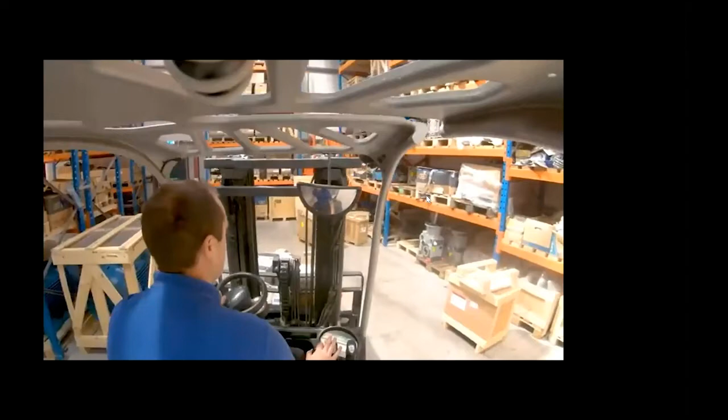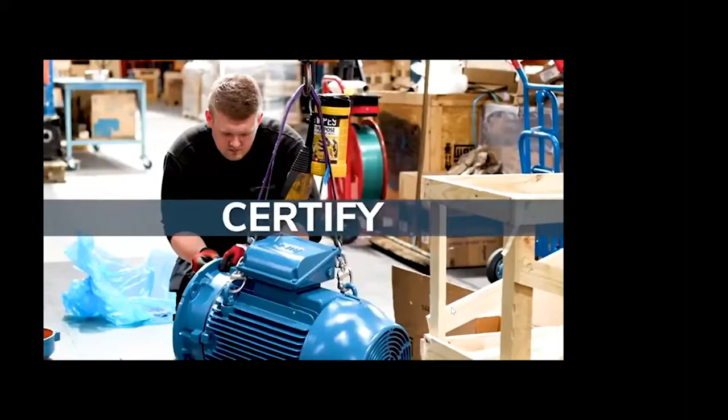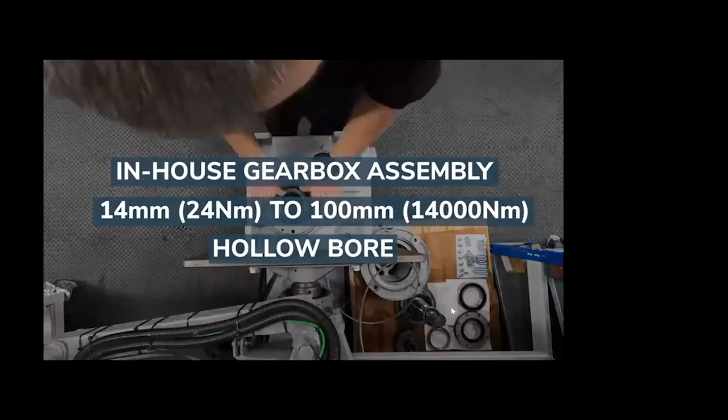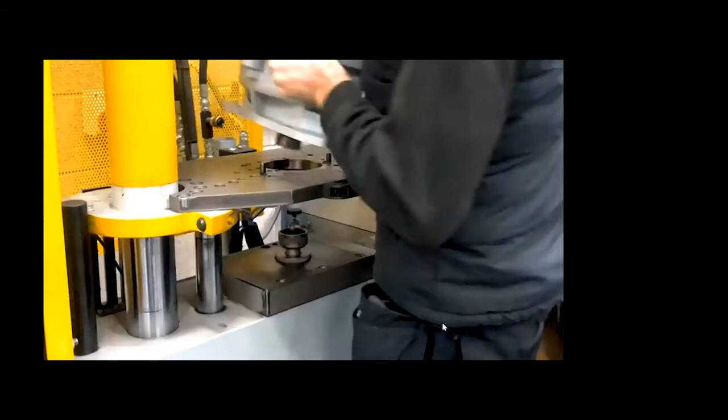Welcome to Technidrive. We'd like to show you a little bit about what we do here and how our expertise in drive systems and integration enables us to lead the way in our industry. Technidrive is not just a name. We are not just a supplier, and we are definitely not just a distributor. We are a system integrator. We take the best that our principal suppliers can build. We engineer them together for our client base. We make their products better, more efficient, more reliable, and better than their competitors.

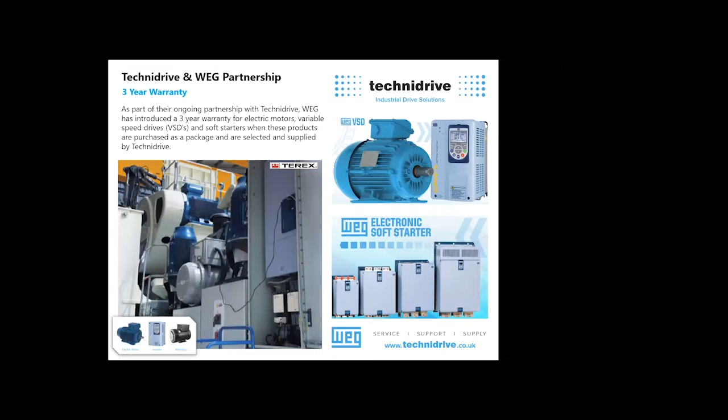Another special feature of the partnership is the 3-year warranty. Something we've been doing a lot is when we supply an electric motor with the variable speed drive and sell them together as a package, we change the warranty from 1 year up to 3 years. That means that electric motors and VSDs, 99% of the time, fail because of application issues, because they're installed wrong, because they're not protected correctly, or things like that.

So what we do is whenever we select it together, we know it's selected right. You put the VSD with the motor, you know it's protected right, and we can basically upgrade that warranty to a 3-year warranty. So that's another special feature.

Another one of our major partners is Bonfiglioli, and we're Bonfiglioli Best Partner, which stands for Bonfiglioli Excellence Service Team. It's the highest accolade in the Bonfiglioli family, and the main feature this allows us is it basically means that we're a satellite assembly plant.

So we no longer stock gearboxes as complete gearboxes, we stock them as component parts and build them from scratch. This allows us flexibility of thousands of combinations of gearbox, all of which can be assembled within 1 hour. It allows us factory level purchasing, factory level technical assistance. We get very involved with product development for both mobile and industrial, and we have huge stocks of it as well.

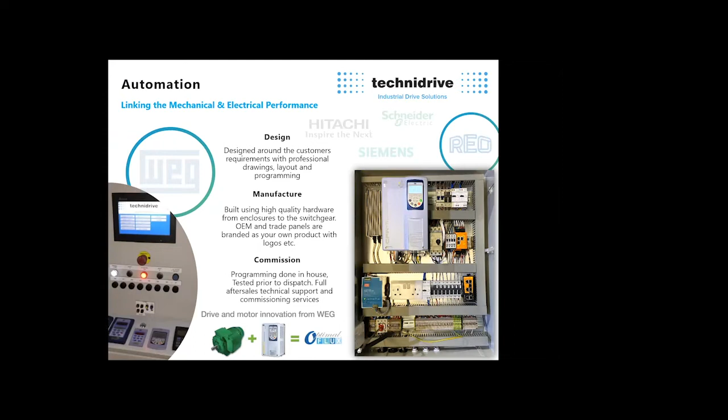Part of what we do is we start off with the design of the complete application, normally starting with the motor and gearbox, where we do a selection on the motor and gearbox, what the torque requirement needs to be, what size the electric motor needs to be, then go back to the VSD. We then start to look at the control and automation that needs to fit around that VSD.

We then design and build the full electrical control system. In-house, we do all the PLC, HMI programming and commissioning. We do the inverter programming and setup. We have in-house testing areas, and then we do a lot of technical support via phone, email, and remote access, which is becoming more and more a feature of all our automation systems, where we're putting in systems to allow us to access remotely, program, diagnose faults, and do all that kind of thing remotely.

One of the strengths of the automation department is what we call soft PLC programming, different to your normal PLC programming. This is one of the main features I want to show you today: within most modern inverters now, you have soft PLCs built in. What that does is allow easy programming of ladder logic within the VSD, and the VSD has access to all the parameters within the motor.

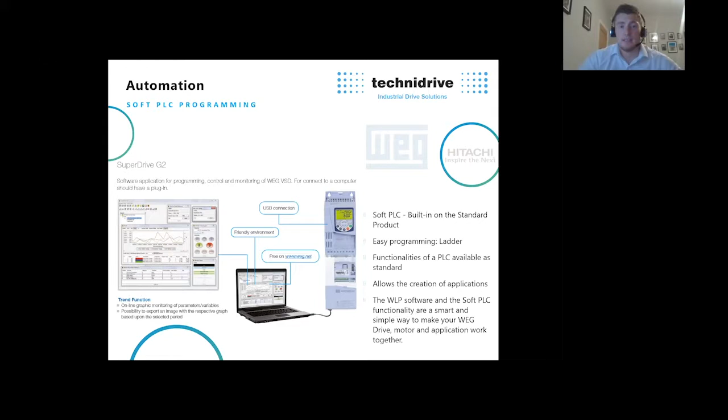So we can do things like virtually any combination of control. You can monitor torque, speed. You can have dedicated user parameters to sense torque and speed. You can have empty chamber warnings. You can have volume fill calculations, auto clean cycles.

For example, you can use figures like what current a motor is pulling to trigger something else in the plant, all without adding any PLC or additional hardware. You could use torque, for example, to monitor something, switch something on, or control a feeder or a belt according to the torque percentage, and that's all done within the drive.

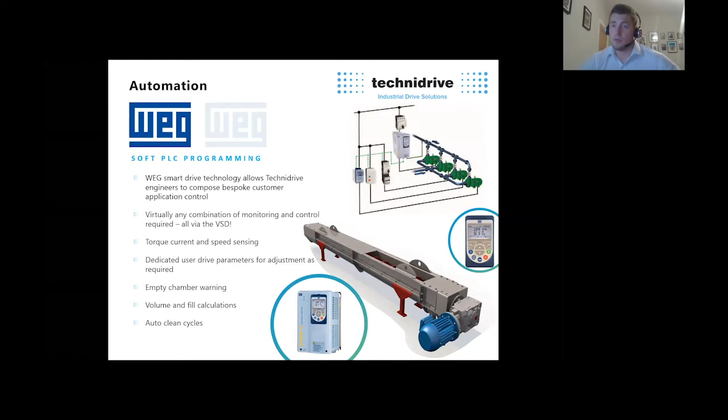So now I'm going to take you through about 5 or 6 different application examples, which will hopefully be of some interest to you.

The first one is a Telestack ship loader project. In this project, we took on to select a full electrical drives package, starting off by selecting the correct torque and speed, and the kilowatts of motors, all based around ensuring the customer gets a maximum feed rate through his plant. This is a mobile ship loader, and basically the name of the game is loading full ships full of aggregates. In this particular feeder setup, it can be emptying 4 lorries onto belt feeders at any one time.

So we started off, we did the full torque calculations, we did the kVA calcs for the generators, and we then drafted a proposal for WEG VSDs, WEG electric motors, Bonfiglioli planetary gearbox, Bonfiglioli bevel helical gear units, auto feed and torque control depending on the load.

So we basically ran the belts as fast as they could according to torque. The heavier the belts were loaded, the slower they would run. Basically, we maximized the amount of kilowatts we had so that it was loading as fast as it possibly could. If the belts were quite empty because the lorries were pulling away at the end of their load or at the start, the belts basically ran as fast as they could. We did all this, provided 3-year warranties and everything, and supplied the customer with the pre-programmed VSDs and all the assistance throughout the project.

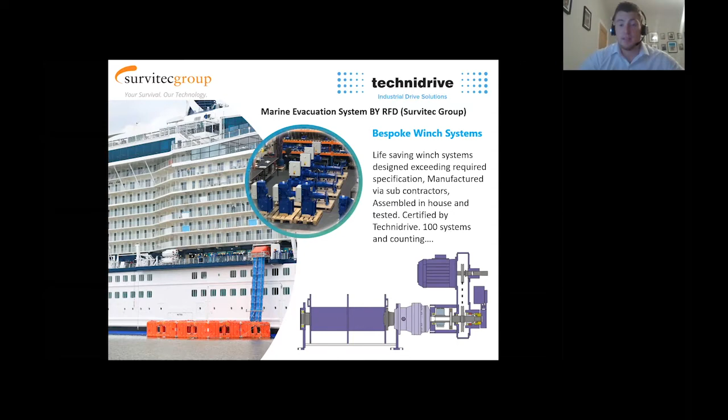Bespoke winches, just to show you our capability to do any sort of bespoke system. In this case, we designed and manufactured, via subcontractors, over 100 winches that go on cruise ships for lowering life rafts into the sea. It's a very interesting application for us, one we do for another local manufacturer here in Northern Ireland, Survitec. We also do an offshore marine evacuation system for the same company, again something we designed from scratch, done all the FEA analysis, all the life cycle testing, and we basically completed that project in 8 months from start to finish.

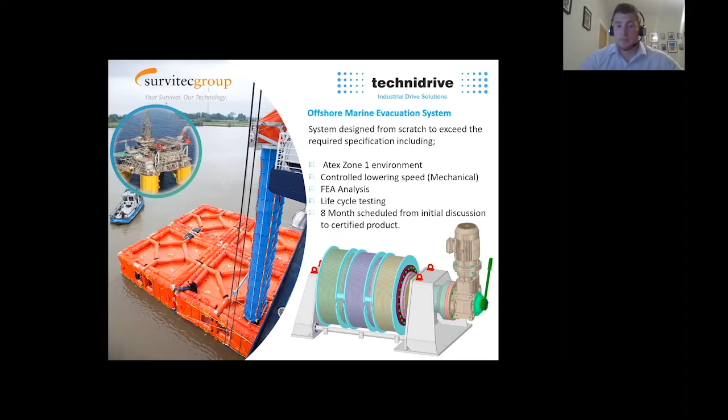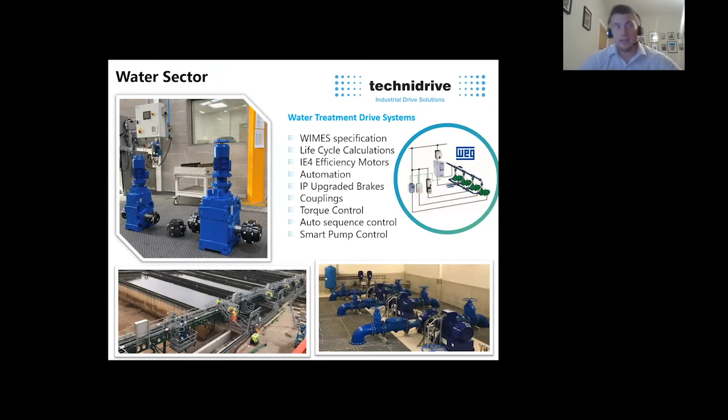Another place we're very strong is the water sector. I know some of you will have wash plants and thickeners and whatnot in your plants. So we do a lot of WIMES specification motors, automation and thickeners, IP upgrades, couplings, torque control, auto sequence control, smart pump control. We've done a lot of selections and design for items within the water sector.

And then this is one that will definitely be of interest to you, and I'd be pretty certain you'll all have gearboxes of this type within your quarries. It's a compact feeder drive, a bespoke design by Technidrive and Bonfiglioli together. Basically what we do is take a track drive design, which is very similar to the gearbox you would see inside the tracks of your JCB excavator. They're a very, very high torque compact gearbox, and normally not that easily adapted into industrial applications.

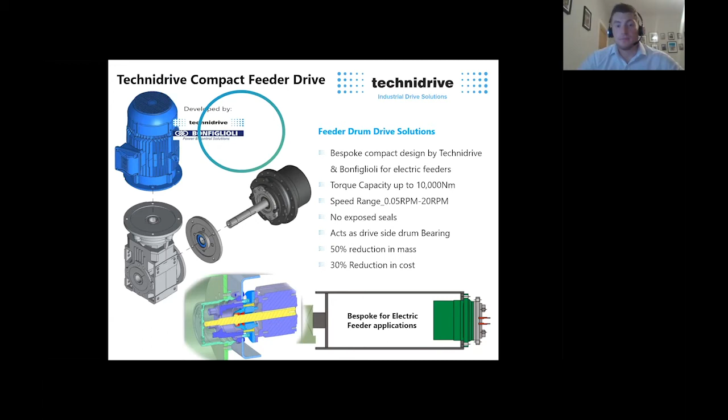So what we do is it basically goes into the head drum like it is in that bottom graphic, and it allows us to have no exposed oil seals. It acts as a drive side bearing, giving a 50% reduction in mass and a 30% reduction in cost. I've included some pictures here of it in application.

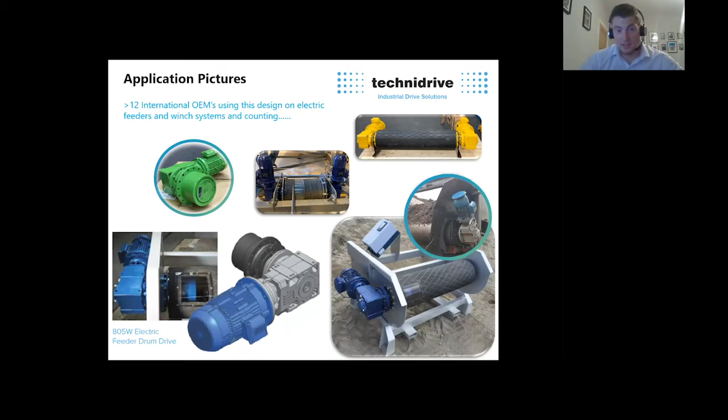And I guess, to break things up again, we have produced a bit of a marketing video on this exact application, which I will show you now.

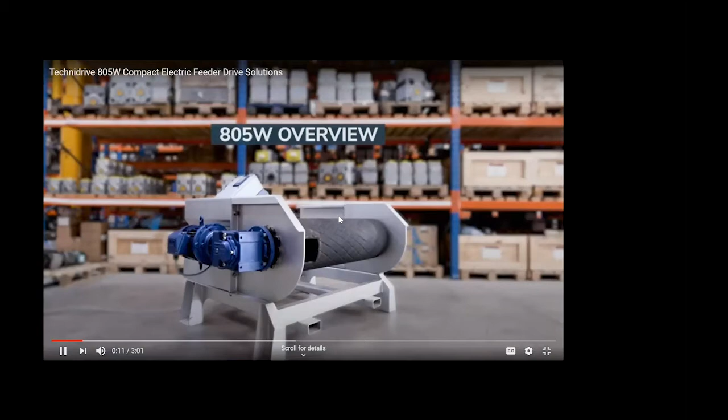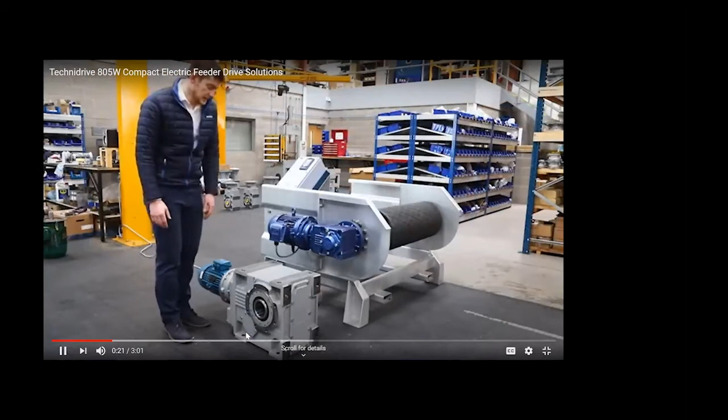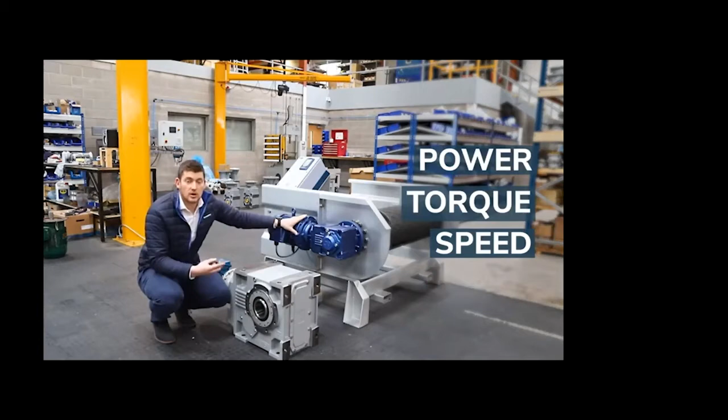One of the main reasons why I want to introduce this product is this here is a typical bevel helical gear unit that is widely used in the industry for feeders, for high torque, low speed applications. The product we have here is an exact equivalent in terms of power, torque and speed. So having the same power, torque and speed, it has a lot less mass, it's smaller in physical size, and it has a large reduction in cost.

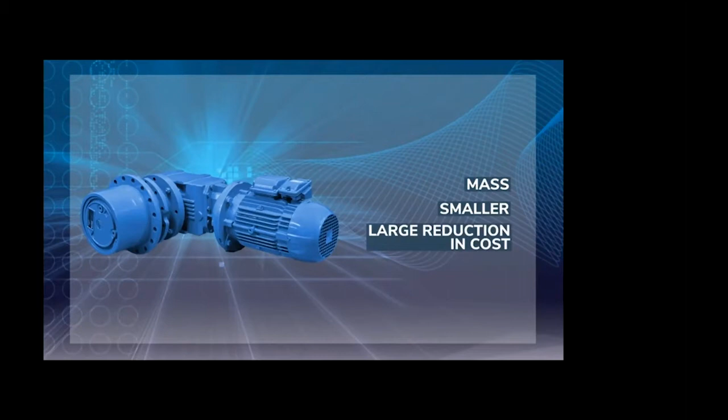Some of you conveyor design engineers will recognise there's no conveyor head drum bearing here. Another advantage of this unit is it has a very high radial load capacity due to it being a drum drive design. That gets rid of the need for a head drum bearing and essentially acts as the bearing, which offers a further cost saving.

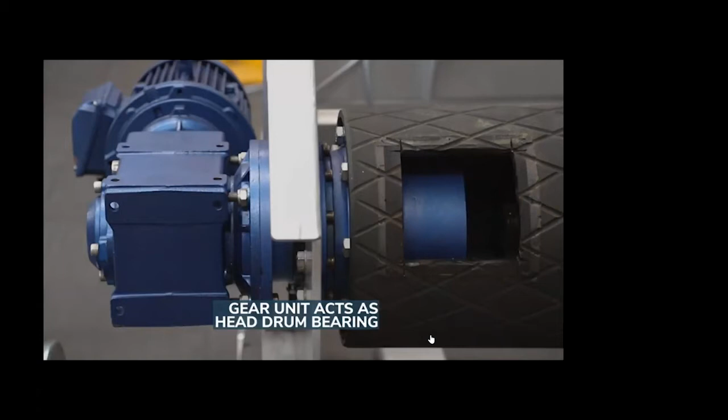One of the other major advantages this drive can offer is there's no exposed oil seals. This is completely enclosed. In here, there are oil seals, but they're again completely enclosed and sealed away. And in here, there's an oil seal which is again enclosed and sealed away from any elements of dust or water.

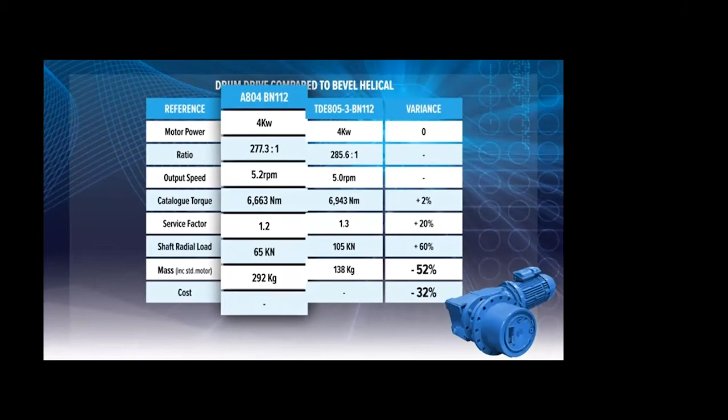What we've done is put together a comparison table of a standard bevel helical drive in this column and the drum drive in this column. For motor power, we've used a comparable 4 kilowatt, a comparable ratio, a similar output speed, and a very similar torque output because the power and ratio are the same.

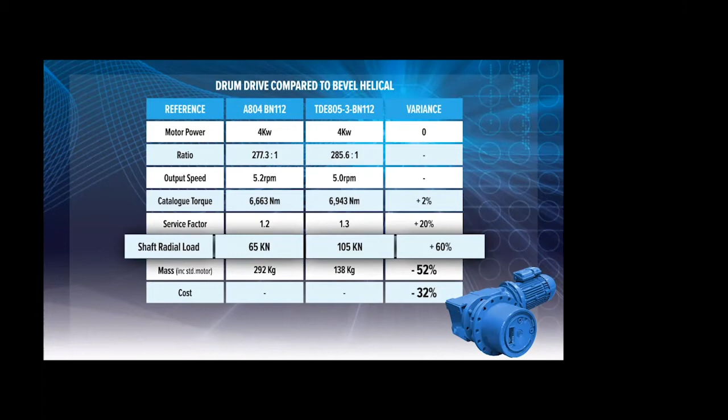So the advantages start with the service factor. You've got approximately 20% more capacity in the 805 than the 804. The shaft radial load is 105 kilonewtons compared to 65, meaning we have 60% more radial load capacity. Our mass is 138 compared to 292, which means we're 52% lighter. And in terms of cost on this particular specification, it's 32% less. That varies depending on the exact spec.

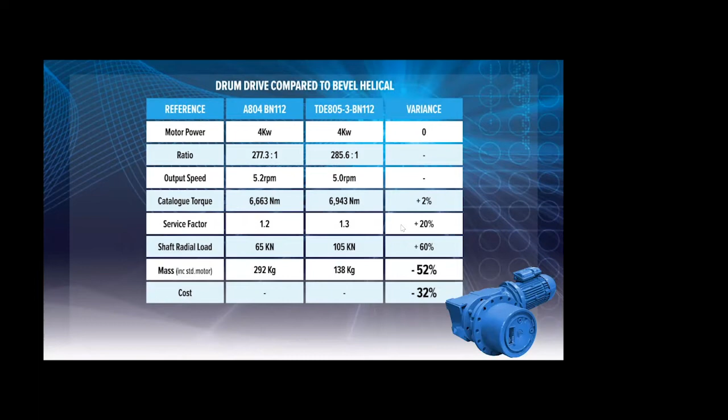However, that's an average. The other advantage we have is there's extensive stock configurations available, made up from stock at Technidrive.

Okay, so I have one more application to show you, which is the main point of the presentation, to be honest, and that's the crusher on block. Let me just get this open again. That's the crusher on block sequence. So what we have is, and I'm sure it will be of interest to you all.

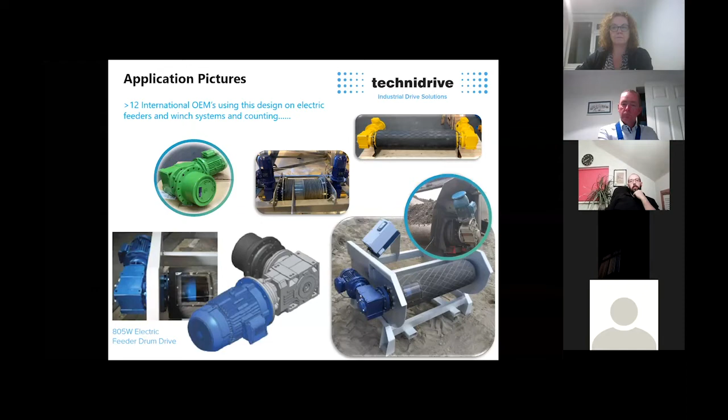So hopefully you can all see the presentation again. Sorry, just before I go on to the crusher on block, one last thing I want to show you is synchronization systems.

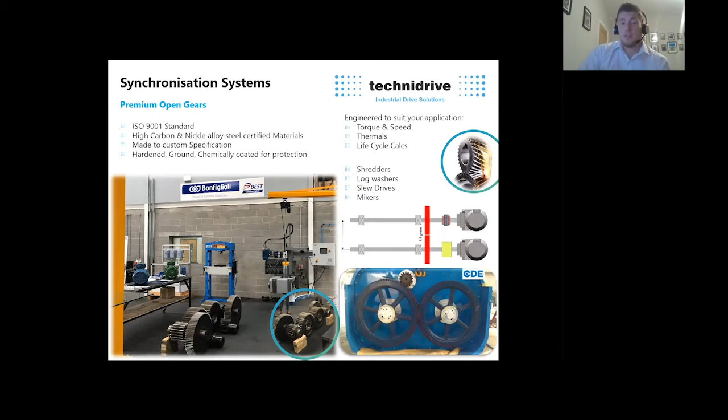We do a lot of premium open gears, which are all manufactured to our own brand, ISO 9001 standards, high carbon nickel alloy steel certified materials, and these are all made to custom specifications. We use them on shredders, log washers, slew drives, mixers. There's an example of two in a mixer.

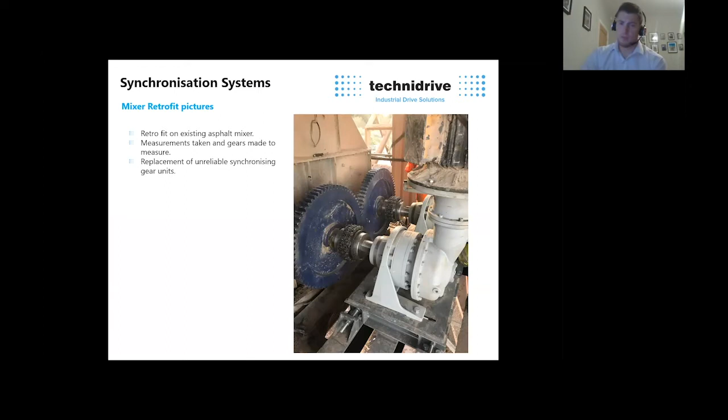This was a retrofit to an asphalt mixer. There's been lots of problems with gearboxes in asphalt mixers in the industry. In this application, we took measurements of the gears, got them made to measure, and replaced some unreliable gearboxes which were causing problems. That application was done 2 years ago. There's an oil bath around the gears which is missing in this view, but that application has been very successful for us.

Okay, the next application I want to show you, which I think will be a big advantage to anyone who has a primary jaw crusher in their plant. I believe a couple of the members here already have this system, though unfortunately I don't think either of them is in the meeting. One's FP McCann's and the other's Breedon Group.

It's basically an auto unblock crusher system, one which we've been developing for probably 4 to 5 years. It's a completely automated unblock sequence with extremely powerful performance, with empty chamber signals. It's a significant reduction in downtime, and there's no more digging out of crushers. It increases life expectancy, and it can also provide energy saving via variable speed drive.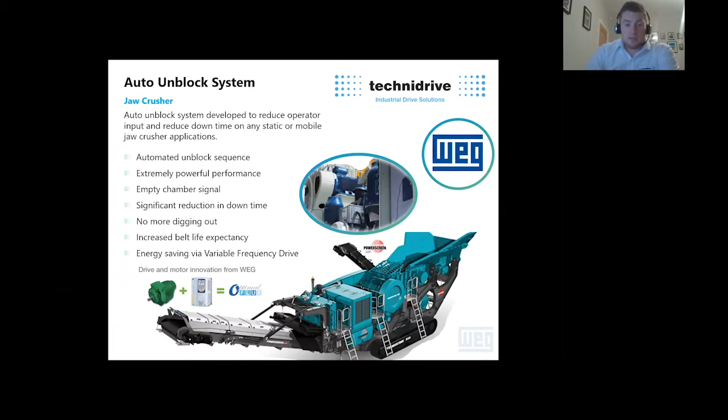So we basically achieve this through control. There's no magic in terms of anything different on the jaw crusher, it's just better control and putting the VSD on the jaw crusher. I've put together a marketing video for it, and that video shows the actual unblock sequence happening. I'm going to play that video now, and after it, that's me done, and we can go into some questions about the system.

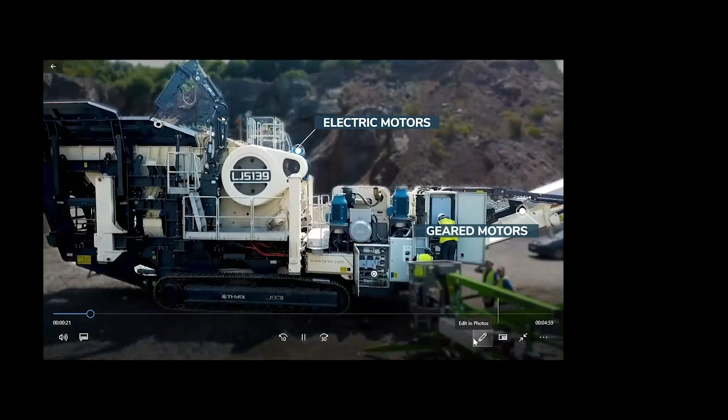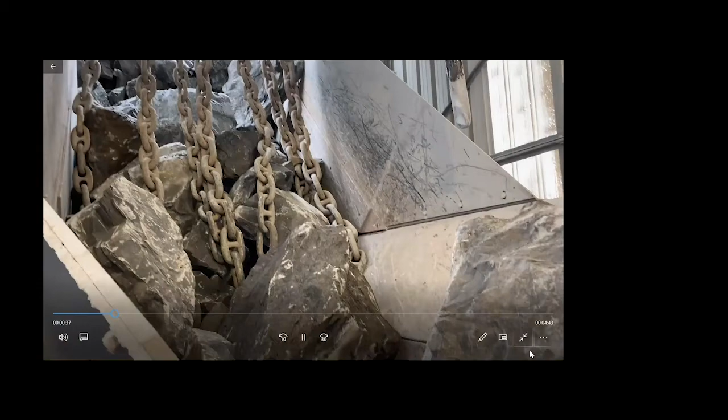This system we have developed basically unblocks a jaw crusher from a static position using forward and reverse action, using several parameters, including current, speed, and DC bus voltage.

I just want to talk through some of the advantages this system brings to quarry operators. As most quarry operators know, it's a major problem when a jaw crusher stops full of stones, requiring a jackhammer, a winch, or someone to manually go in and remove stones. This system automatically goes forward and reverse to remove them.

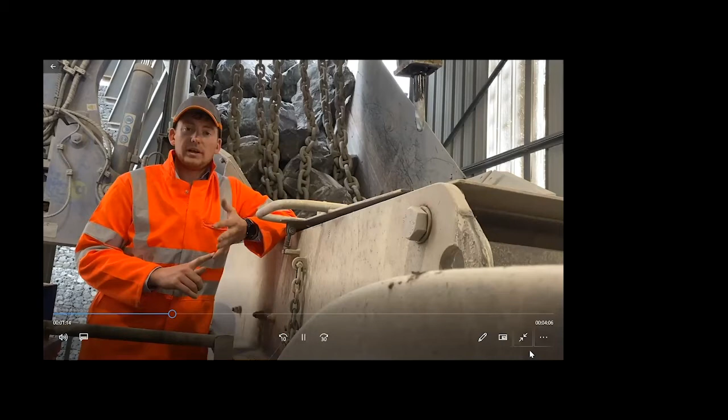It is a major advantage for health and safety because no operator needs to be near the crusher when it's done. It's done by simple press of a button. The system does it completely automatically, and whenever it's run free, it gives the unblock complete signal.

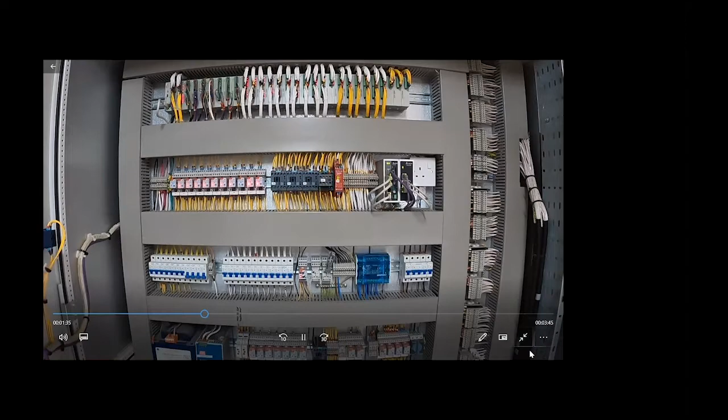Another advantage is the protection of the electric motor and the jaw itself. Because we are monitoring so many parameters, we offer much superior protection over traditional methods, which can increase motor life and equipment life. For that reason, we can also upgrade the warranty to 3-year warranties on inverter and motor.

And the last major advantage is time. As we all know, time is money, and the time aspect with unblocking a full crusher can be astronomical. With this system, normally within 4 to 5 minutes, the crusher's fully functional again and running clear.